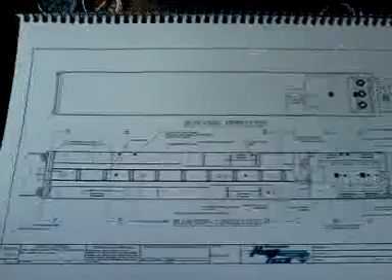So we're going to start with the floor plan. This is the two levels of the trailer, this being the bottom, and this being the top.

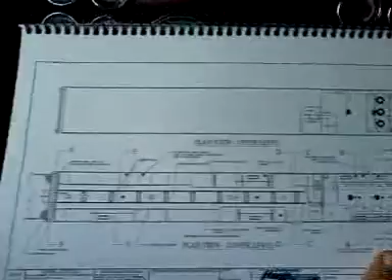This is looking from overhead, just like the blueprint on a house or something. This being the rear, and this being the front. The top is obviously very bare.

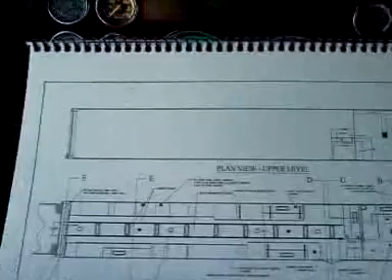This is where we park the cars for transport. The primary, which is the one we intend to race, is in the rear, and the backup is in the front in case we have a problem with the primary or bend it up.

There's also this area, about 50 inches high from floor to ceiling. It's just enough room to get a car in there.

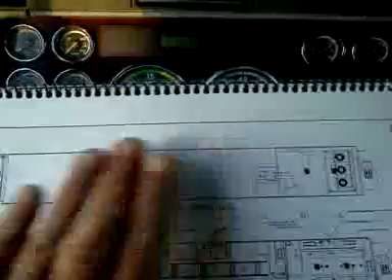This area is actually elevated from this area, and it's only about 20-30 inches from the ceiling to the floor of this area, because underneath this is the lounge area.

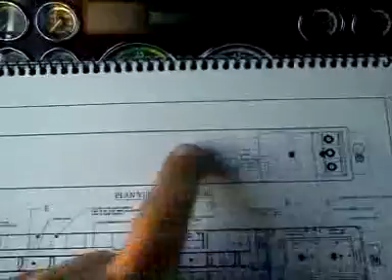You've got a couple of air conditioners, a DirecTV dish here, and usually some lights on the wall and several accommodations for tie down.

Now we go to the bottom floor here, and it's kind of cut into thirds: the left side, the right side, and the middle.

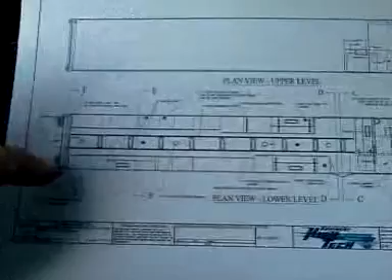The middle is pretty much just a hallway. It's clear, a floor you can walk down, and it also has accommodations for tie down.

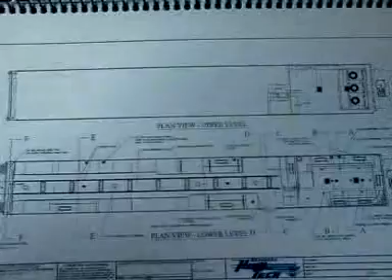Generally it's airline track, and we use little ring devices and straps, or there may be holes in the floor to apply chocks with pins, etc.

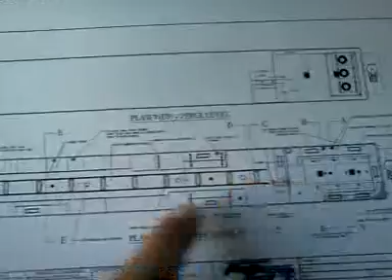The left side generally could be cabinets and benches and other sorts of stuff.

You get up here, and this is a stairway that goes up about - well, this area right here at the bottom of it is the elevation of the fifth wheel.

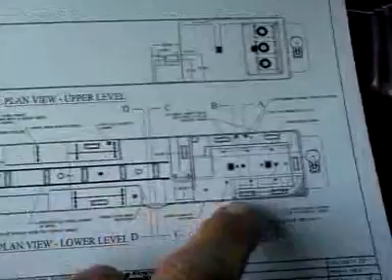This area right here is called the lounge, and it usually has couches and desks and cabinets for the drivers.

It's where the drivers keep their uniforms, and the crew members keep their personal items during the weekend at the race.

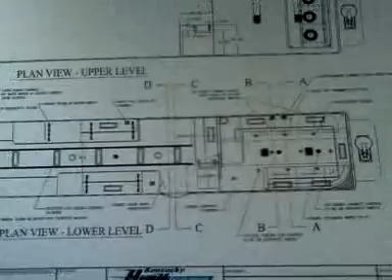Now we've got the floor plan figured out. We're gonna go to another drawing here, and this is the roadside elevation - that means the left side of the trailer, the left side of the aisleway.

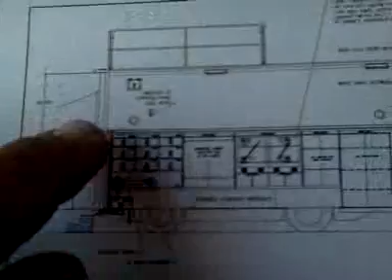In this particular one we've got 9 crew lockers - little cubby holes for the crew members to keep their personal items, their helmets, their backpacks, their man purses.

Or purses, you know - some crew members. We do have several female crew members in the Nationwide series.

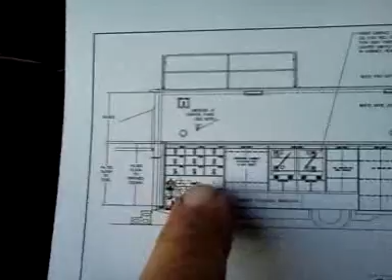This is generally the area where you'll also find the galley. Of course, on this particular one, it might be on the other side.

But then we've got, let's see, a wardrobe cabinet, and then a radio cabinet.

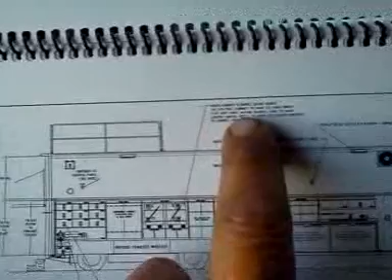With Lexan doors, 110 volt receptacles, 2 hardwired 110 volt vent fans, fan guards on the vents, the lighted switch, blah blah blah.

Anyway, this would be where we keep a radio system, and keep all the chargers for your radios and such.

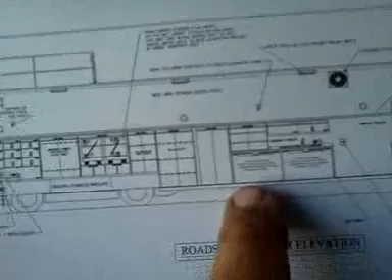And then we have a motor storage cabinet and another motor storage cabinet - that's where you keep your engines.

And then here we go, we got some stuff. It says this whole wall right here is just mirrored stainless, which I'm sure that area right there is probably for a shock dyno.

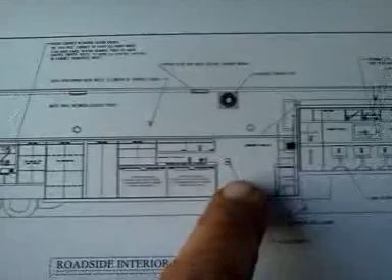We used to test the shock absorbers prior to putting them on the car. And then here's a bunch of office chairs.

It looks like there's probably just one long counter right here, and then there's looks like there's a flat screen TV, and then there's the antenna for your satellite.

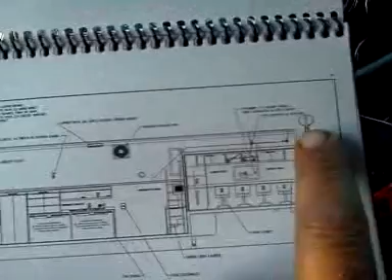And then we notice upstairs here we've got an exhaust fan - this area gets real hot during the day.

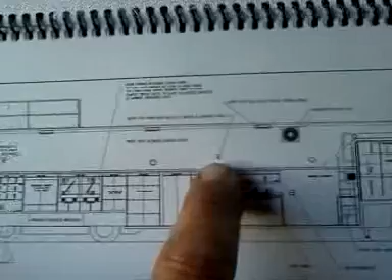And then we've got a power outlet, and that's handy - that's handy for just powering up stuff.

You know, if you need to charge a battery on the backup, or put a fan in there or something.

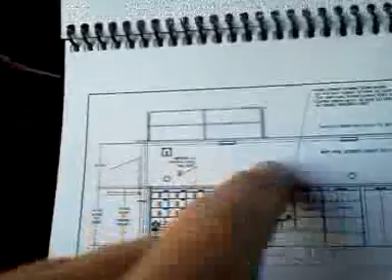Okay, and then this right here is an observation deck on the roof of the trailer. This area right here will have a ladder.

And this right here is a lift gate, that actually doubles as the back of the trailer going down the road.

When we're at the track, the lift gate is placed in this position. There's a set of stairs here, and then there's 2 doors here for access in.

So anyway, we have a ladder to the lift gate, and then we have a ladder from the lift gate to the roof for the observation deck.

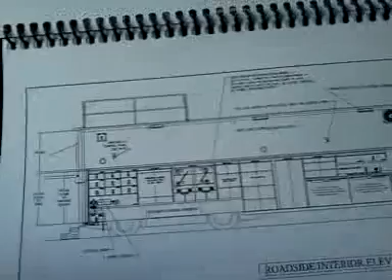Depending on how much technology you have at your disposal, there's usually a computer monitor mounted up here that's hooked to a computer, either up front here or it may be right back here.

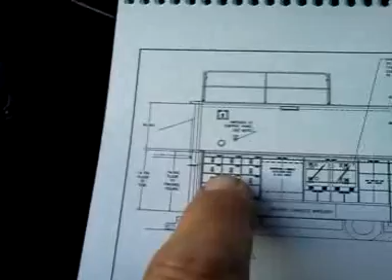And we get live feed timing and scoring from NASCAR via microwave, and that gets displayed up there.

Okay, so that's the left side. Now we'll go to the right side.

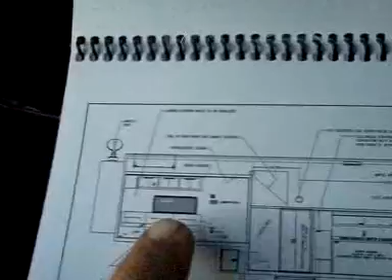In this particular one, it's got a window, and there's our dish again, and now we've got a sofa on the right-hand side. This area right here is a small storage area - generally we keep compressed nitrogen in there.

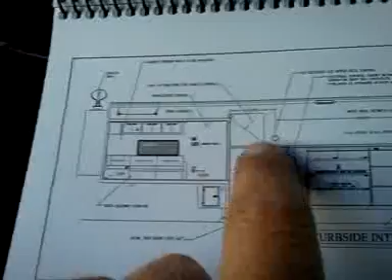There's the steps, there's also a side access door, and then we've got another engine storage cabinet. There's all sorts of different equipment we can keep in here.

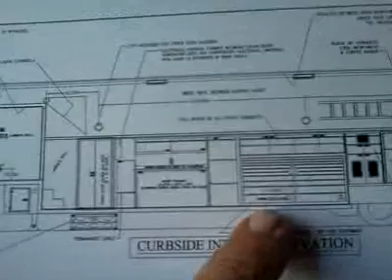There's a bench, I believe, with a power outlet, and then overhead cabinets, and then a vertical stack of cabinets, more cabinets, and then these are C-Tech drawers.

A whole bunch of drawers that we store parts in - nuts and bolt assortments, hose clamps, etc.

This is an air conditioning outlet situation, and here's your galley - we've got a refrigerator, we've got a...